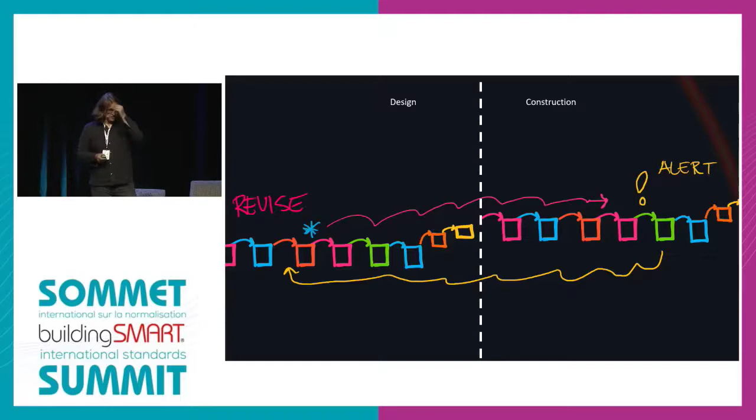If you can't do that manually—because if you imagine how this is done today, very smart and very hard-working people have to trace back through those processes through meeting notes or logs or all these things—if you can't do that, you can't possibly know when to do this. And so the point is that you could make a circular loop within this process between design and construction. But this is just a microcosm, obviously, of the whole industry.

So if we look, where I've started to look at this is a word salad—it's a good term, I do like it. Basically, when I started doing this effort, it just started with this statement: someone wants to change this to that, can we? And this is kind of the question, I think, as you're looking ahead to make a digital twin that can actually react to change, we need to be able to understand how this information comes together.

Some of them are human-driven, some of them code-driven, because at the same time you want to be able to check against code, local requirements, and all these things. And if you think hard about this problem—sorry, I'm going to get myself a drink of water—if you think hard about this problem, this is a very difficult concept to manage today.

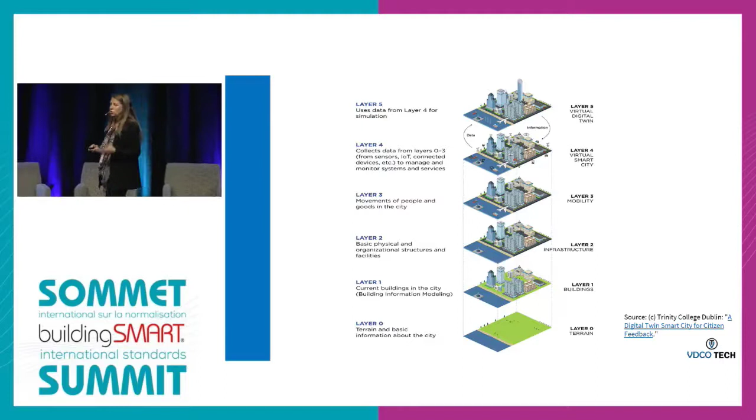That digital twin is where the simulation is happening, so you can come back and inform your citizens: hey, park here, traffic is backed up here. So how you use that and how you simplify it is ultimately how I think you can sell it and procure it. Because there's a lot of planning that needs to take place when we're working in digital twins—the need for it, the use case—but I don't hear people talk much about security of that data, and I think we need to start focusing on that.

BIM execution planning—we all talk about our BIM use cases. I've yet to hear anybody talk about the digital twin use case. So when I start looking at things for my clients—I actually hold the prime contract as a small business under $2 million. I'm the prime contract holder for the BIM VDC on-call consultant that has everything from BIM to GIS to digital twins, down for this county.

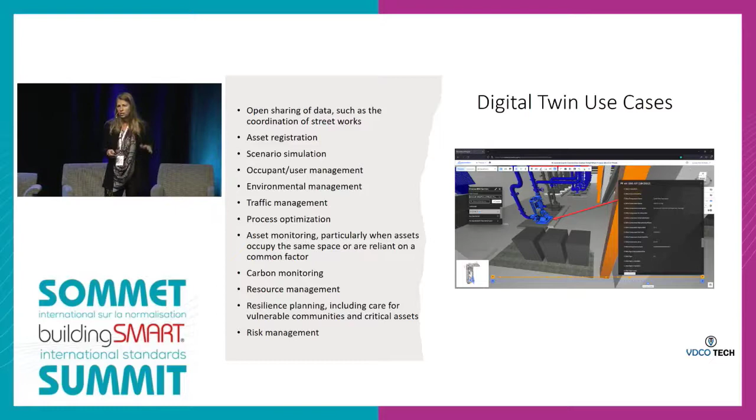And the reason I get chosen is because I say, let's define these uses. Let's look at whether you're going to use it for process optimization. Are you looking at it as part of your asset registry? And ultimately, how we looked at it was for risk management, to help them start down their journey.

And I really don't like to reinvent the wheel. So I am queen of Google, queen of simplification, because I don't understand half the time what all these technology people are telling me. I have to Google what they're looking at—what are these terms, what are these abbreviations. So I look to see what's out there. When I Googled digital twin, did you know there was a digital twin periodic table? Really cool, Google it—you'll find 50 graphs, 50 different things about the digital twin periodic table.

But I found two documents that I think might have value to you. The BSI Flex 260 came out this year—January 24th, 2022. And really it's about organizing, creating, and managing your digital twins as it relates to your assets, your systems, and your processes. It has some good information that I'm going to highlight for you.

But my favorite thing, and why I showcase this, is it actually had a definition, and it's an ISO definition. So I strongly encourage you—if you don't remember anything else about my presentation—please look up the ISO definition for digital twin and use it in your organizations and within your own documentation. It's talking about observable elements that you then tie into a digital representation.

This document goes a little bit farther, and it says how you're looking at the simulation of that asset, whether they be virtual or physical, and how you're tying that into your planning processes, how you're using it for validation, and looking at how we're going back and forth between that observable element and that virtual as part of your digital twins.

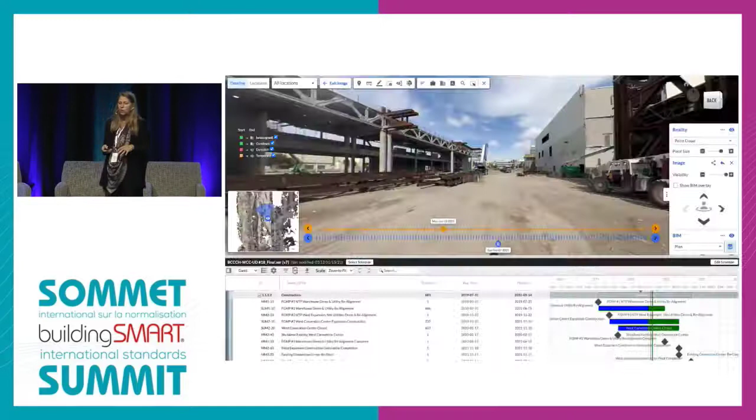We were able to take their photo captures that were already on site. We tied it to the P6 schedule, again, part of my regular service line. What you see in green should be installed at that date and time. What that enabled us to do was to manage project risk. That's the use case. We monitored critical path in a visual way that our clients saw the physical environment and turned it around to say, here's what the virtual environment is, and now here's what it should be.

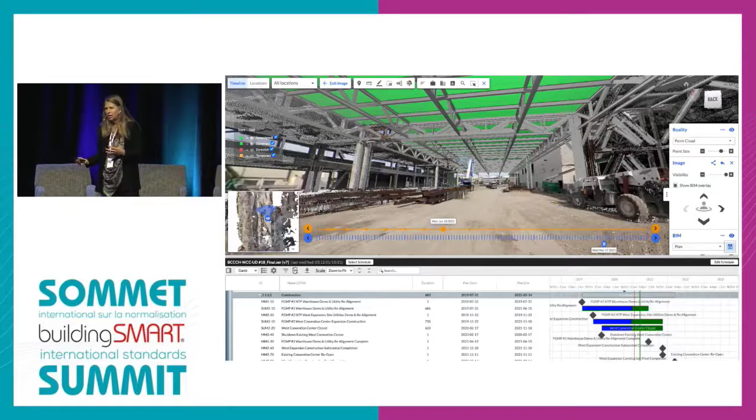Proactive risk assessment, being able to inform that schedule, had immediate value to our client, and it got them excited to talk more about digital twin. If I just would have gone into them and said, here's what I need to implement your digital twin effort, and talked to them about technology without showing them something, they wouldn't have been able to do it. They wouldn't have understood where we were trying to go.

Assets to your digital twin, it's that virtual representation, the real-time data, you're looking at analytics, and it all talks about data interoperability. When you're moving it forward to our clients, the digital deliverability to the asset registry, we look at all the differences, we map their different data sources, we identify pain points. And we say the pain points between these organizations and these systems ultimately can go back to your digital twin, and how we round trip it.

I keep it simple for a reason. The biggest problem I think in our industry that we face today is how we can hire people, and that the people we are hiring have this level of maturity. So we need to educate ourselves continually, but we also need to educate our clients and our workforce, because this is where we're going. The data standards and governance are important. The asset registry and data templates, it all builds upon itself. The digital asset data and onboarding.

How many people have actually been in the field and done in-field data collection? Not a lot. In a room like this, every single one of us should go out there and see, because that's where the process breaks, right there. That's where it costs you a lot of money. So you need to understand how you're getting the data into these systems, where these systems are connected, before you even talk about digital twins.

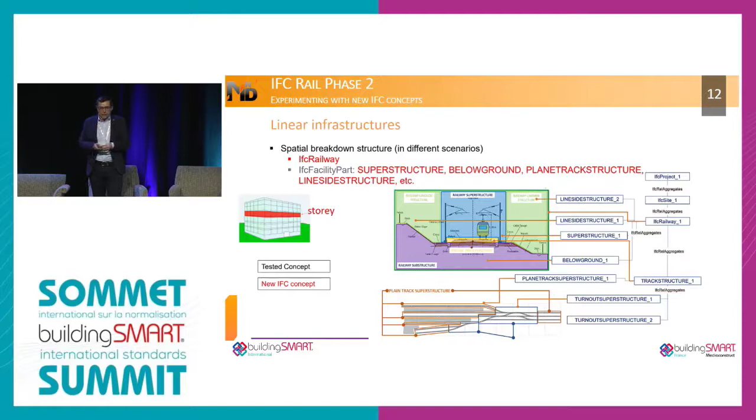The key of this phase was the storylines, in order to validate the project test configurations. The storyline was chosen according to the business cases that were important for the different stakeholders of the project. For example, for MIND and SNCF Réseau, we selected the deployment of the modern signaling system, the ERTMS, the substructure renewal, or the urban railway infrastructure system integration.

I don't have time to describe all of this. Just a few words on the ERTMS, the European Rail Traffic Management System.

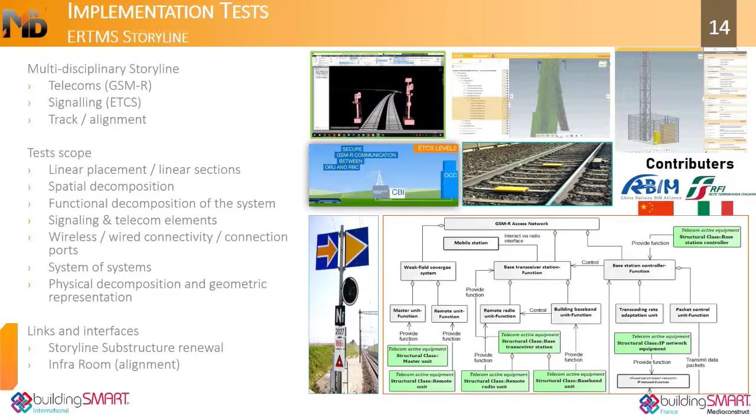It's a multi-domain storyline because it addresses telecom, signaling, and track alignment elements. It's an interoperability system, not only at the European level but also worldwide, which explains the interest of our colleagues from Italy and China. We also addressed the design of a GSM-R, which is the railway telecommunication system, particularly the base stations.

Another example was the urban rail infrastructure system integration storyline, with more than 6 exchange scenarios which cover a multitude of domains like common spatial structure, cabling, and so on.

To finish, the IFC 4.3 Rail Phase 2 success probably comes from the work of multiple groups, railway stakeholders, and software editors who contributed directly to the implementation tests. The most important fact is these actors have strong conviction about openBIM.

It's the case of SNCF Réseau, my company. For us, openBIM is a core value already implemented in our strategy. We are really convinced of the importance of openBIM: first, interoperability; secondly, the openBIM solution ensures independence from software editors, as we can use multiple data sources and open objects.

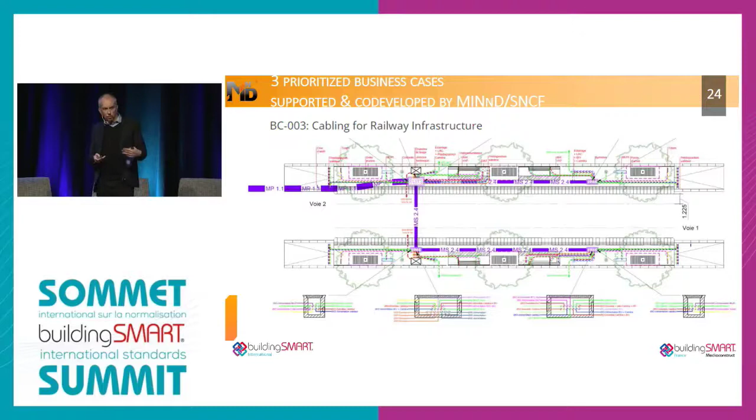The first is about model federation. The second is about stationing along an alignment, which is very specific to infrastructure and has to be implemented regarding the best practices of the business. The third is about cabling for railway infrastructure, but it is also a common business case that is very valuable regarding how to describe networks in a territory.

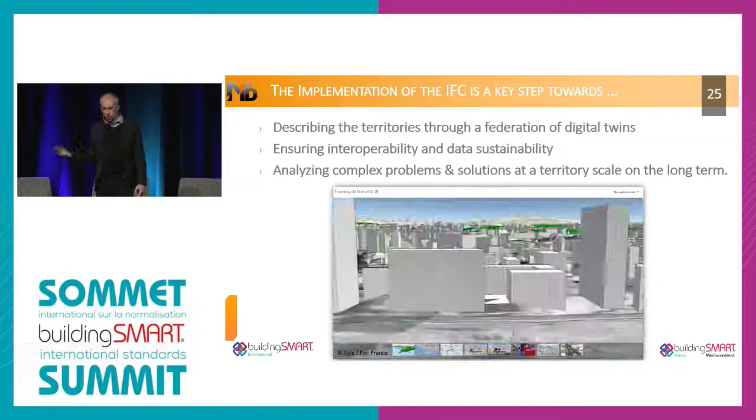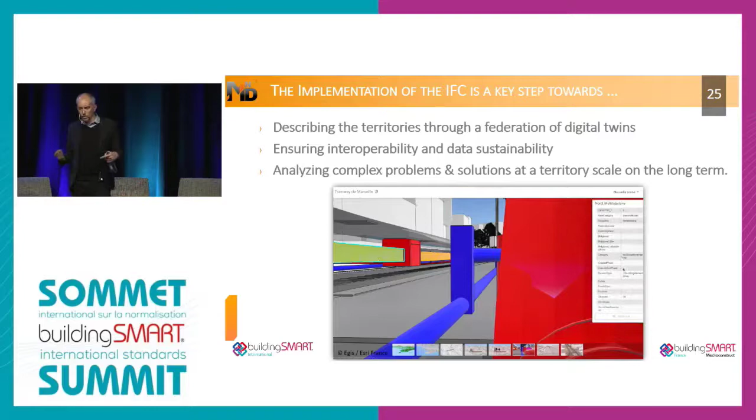So to finish with, we think, as French stakeholders, that the implementation of the IFC is a key step towards describing the territories through a federation of digital twins, ensuring interoperability and data sustainability, and analyzing complex problems and solutions at a territory scale on the long term. Thank you very much for your attention.

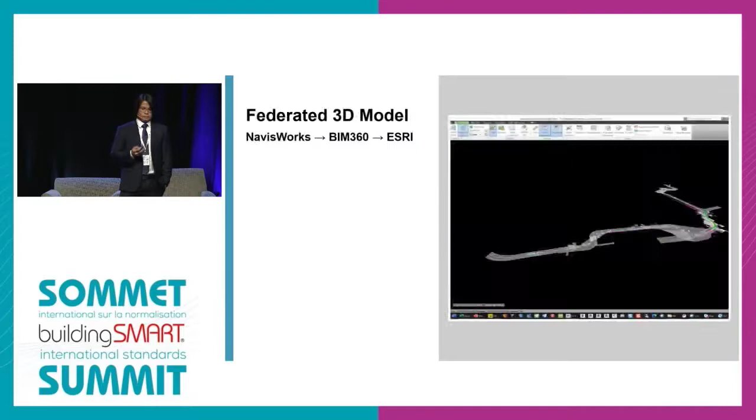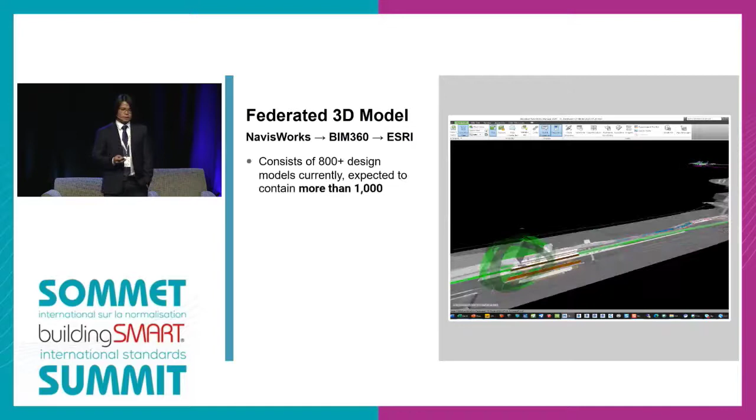So lastly, here's a snapshot of our federated 3D model, which we created using Navisworks. In this example here, we have around 800 plus design models, which is a combination of our vertical design and our horizontal design.

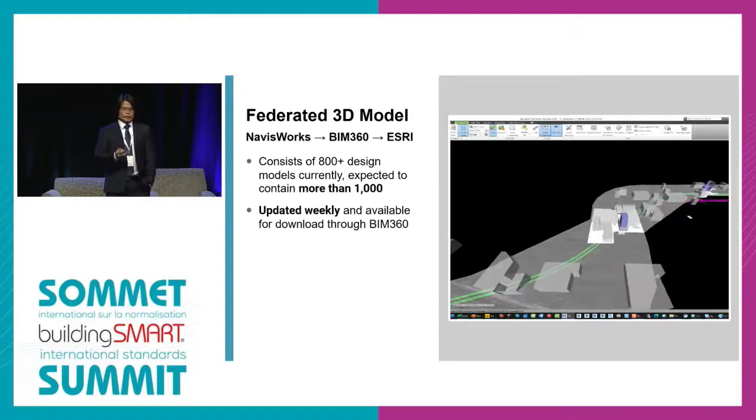What we do is we have this weekly update into BIM 360 dedicated folders, and we put this together so then the project team can access it. Again, these are source models that we use for plan production, but then we export them to Navisworks file versions for our federated 3D model.

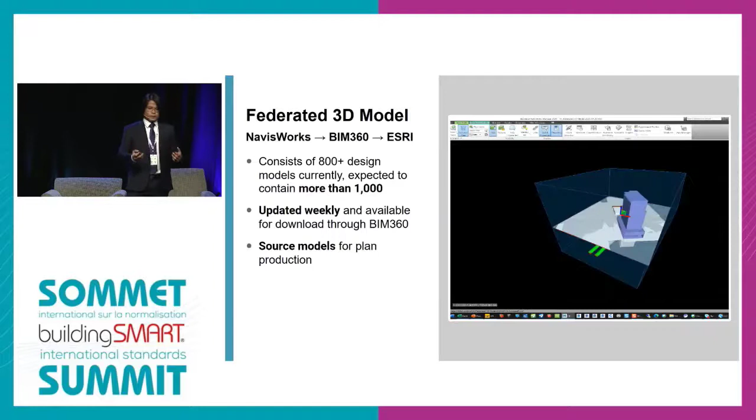Now, lastly, these models are used for clash detection and 4D phasing in conjunction with reality mesh and LiDAR project data. And Cameron will talk about that later on, so I'll pass it back to you. Cameron? Great, thank you, Ken.

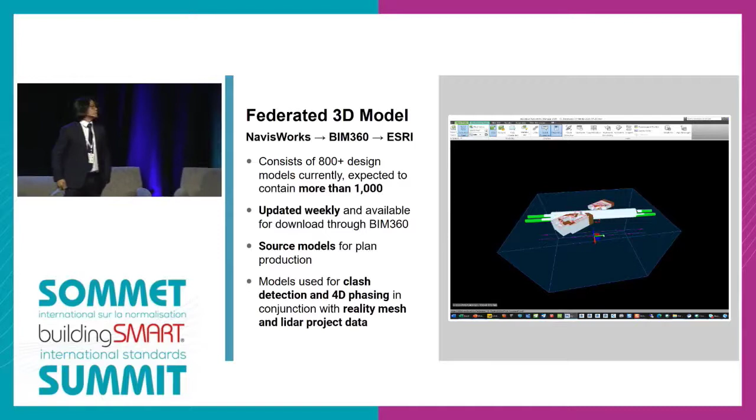Yep. So a lot of common themes here today. Different information and different platforms, and how does it get utilized, and how does it get consumed, and how does it get organized, right?

And the whole point of why we really wanted to walk through the digital delivery workflows and how we manage that information is because I think it's really important, and what we've learned, is structuring the data that you have at the beginning, setting up those protocols early, listening to what the client's needs are and the end states, and then defining how you're going to get there.

So that's great. We've got all of this data. We've got 10 terabytes of point cloud information, 1,000 models. But as Cindy was talking about earlier, how do you distill this down from a client's perspective to what that means, and what they can do with it?

Generally, with the clients, with the executive teams, with the stakeholders, you're not going to set them up with a $12,000 BIM computer and have them look at this information. They need an easy, accessible, intuitive way to access this information. So from the beginning, we talked about this idea of our Ontario Line GIS Hub, and this is a tool to reflect progress through a single source of truth.

I like to refer to it as a window into everything that we're doing from the technical side. It's not a replication, it's a window to see through into information.

We defined that need at the beginning for a comprehensive ArcGIS Hub solution that would allow us to reflect our up-to-date design intent to a much wider audience. We've got well over 1,000 individuals using this tool. We needed the ability to share single source of truth information across multiple different stakeholders, companies, time zones, countries, offices.

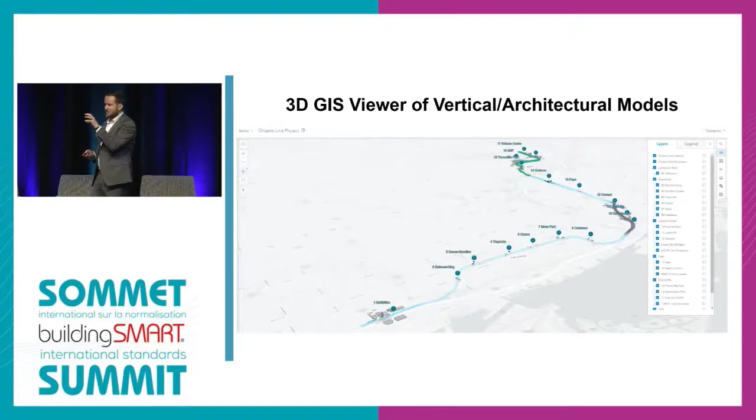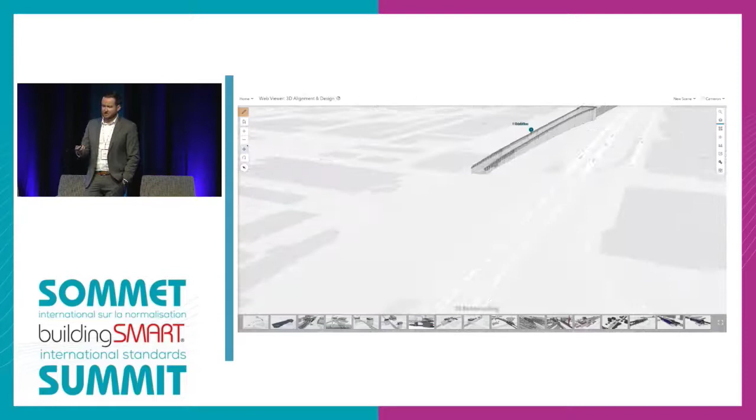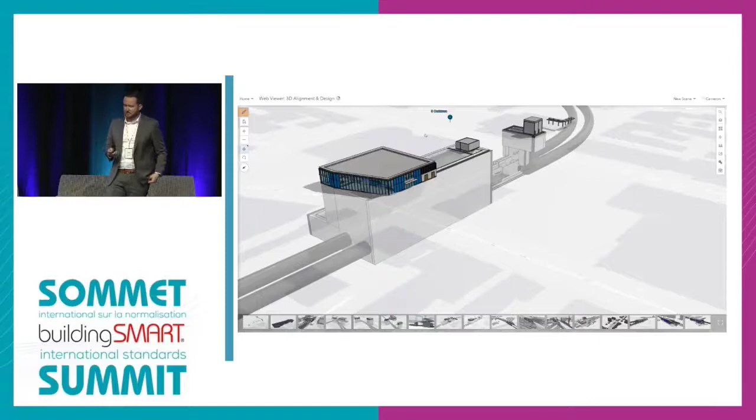So we started with all of that information, and the first step was taking those models that Ken talked about, over 800 models, and making those accessible and putting those geospatially in context. That started our path of connecting our BIM 360 models into the Esri 3D scene environment, with a dynamic automated connection so the same information informing our design is auto-populated and made available through the Esri web environment.

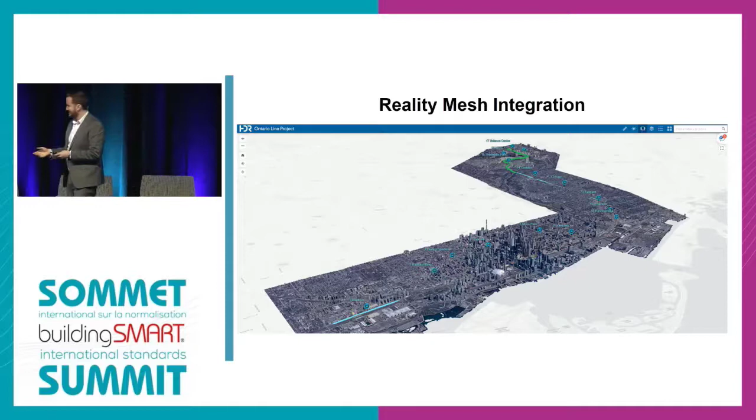We then took it a step further and said, what about our reality mesh data set? For those unfamiliar, a reality mesh is a photorealistic survey grade mesh that can give you various levels of accuracy. We partnered with a vendor called Nearmap, an on-demand reality mesh provider, that provides data roughly 11 inches horizontal, 16 inches vertical accurate. Reality meshes can be created up to centimeter accuracy as well.

This is a 20 square kilometer mesh of our project footprint that we're able to bring into this dynamic GIS viewer. It's not just GIS this mesh is helpful for—we can also integrate various forms of this mesh, whether 3MX, OBJ, FBX, or even point cloud information, into design applications like Civil 3D, Revit, and InfraWorks. This becomes key to how we can better contextualize and understand the built world we need to integrate into. That was our next step, integrating this into the GIS Hub.

This is a very large file, traditionally very hard for people to use, consume, and access. No longer is that the case—it's through nothing more than a web viewer now. So this is a core component of what we ultimately see being part of our digital twin solution.

As Cindy was talking about, I think she referred to them as layers of the digital twin—there's maturity levels of digital twin, different ways of saying what that data is and how you progress. This is a core component of that very first layer.

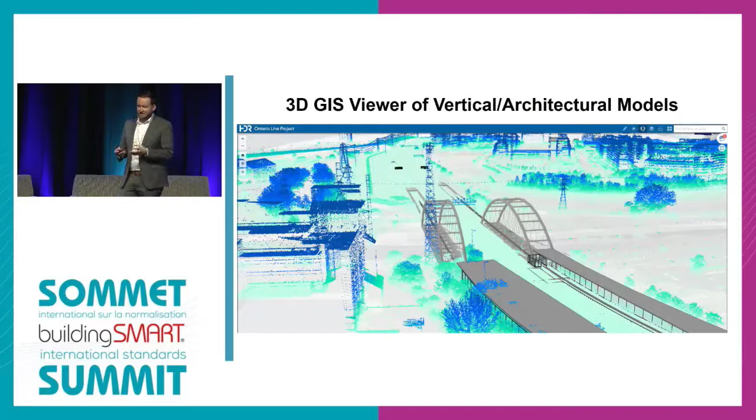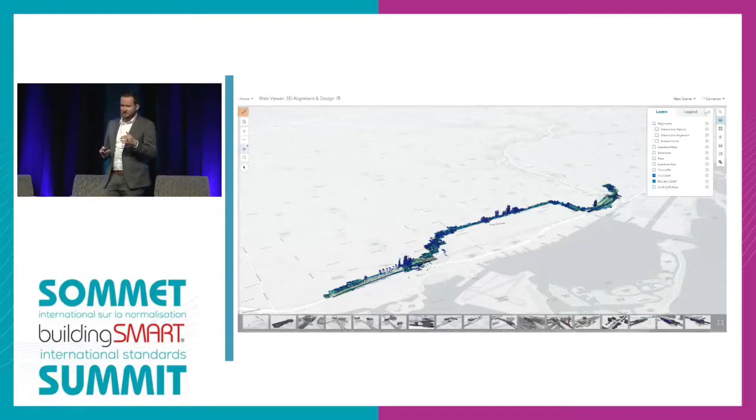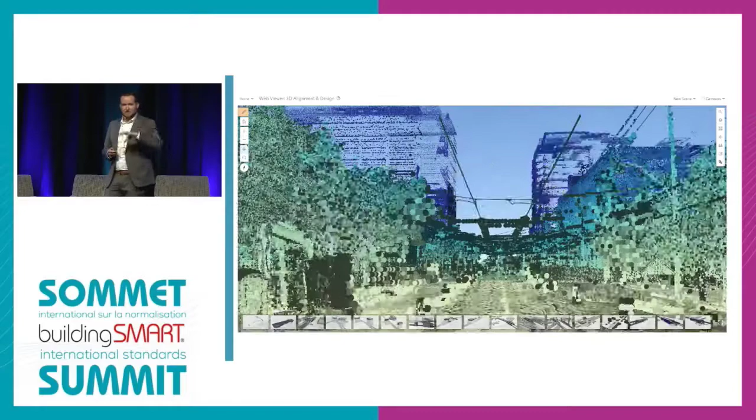We then looked at how do we take it a step further. We have over 10 terabytes of point cloud information, whether aerial, terrestrial, or mobile LiDAR, and there's not a person at our company who can process, manage, and run all of that LiDAR on a single desktop application. So we brought this into the same tool, and now we're able to take all those 10 terabytes of point cloud information and distribute that to thousands of individuals—more informed information in more people's hands to make better decisions.

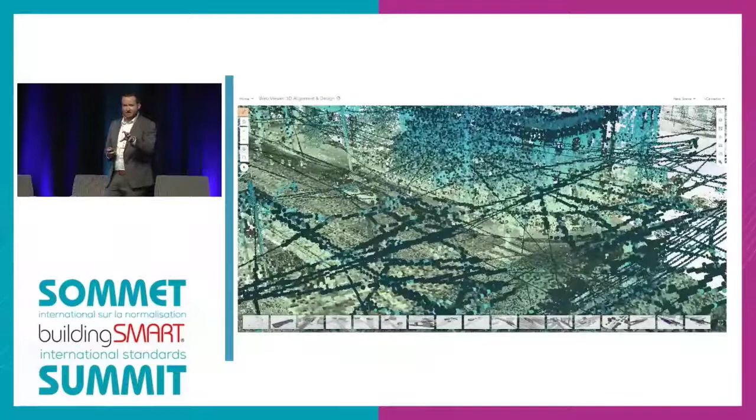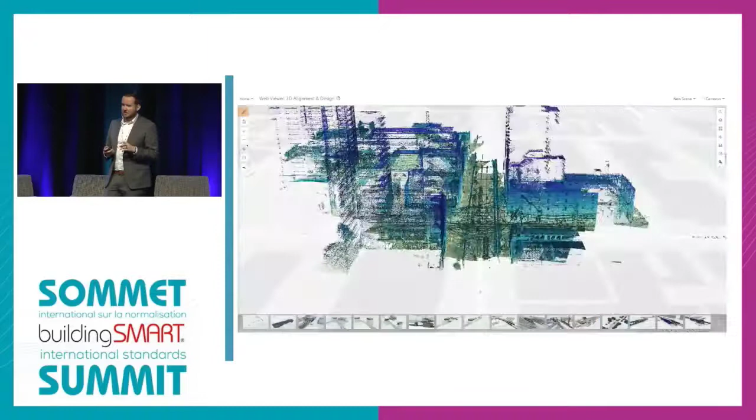Being able to look and contextualize, in this case up to centimeter accurate reality capture data, along with our proposed models, really helps our team understand and have conversations around a 3D environment rather than always trying to do it in a 2D environment.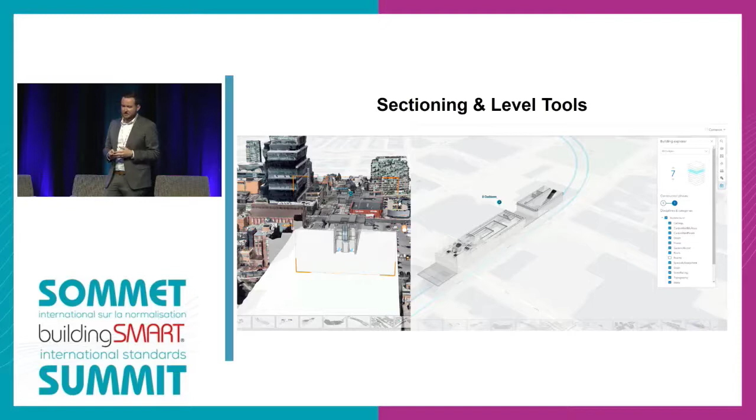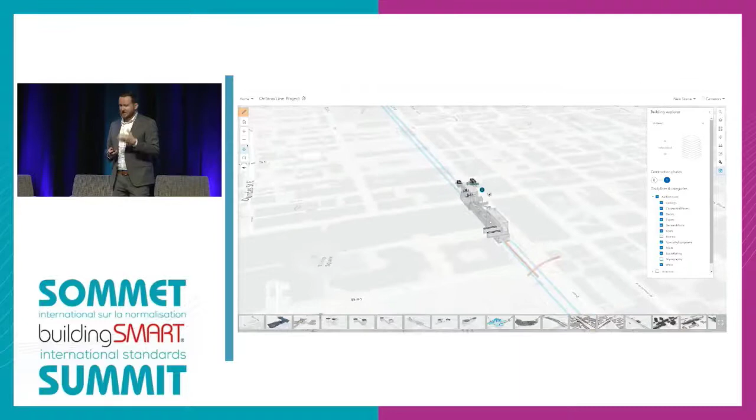And then lastly, one of the other tools within our 3D GIS hub are sectioning and leveling tools. Because this information is dynamically populated from BIM 360, it's not just the model that's populated, it's also the information within that model. So we can use Building Explorer to look at the different levels of the model, the different construction phases within the model, and various attributes, turning those on and off. We're putting these tools in the user's hands, not having to do this for our client or our teams from the digital delivery perspective.

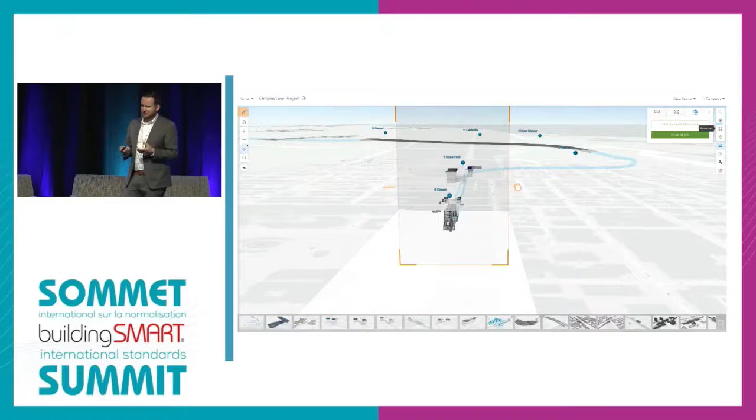This is an intuitive, easy tool that our teams are able to use. There are different ways to slice and dice the models, and various different content as well, as you can see here. Easy, accessible tools let the user place those section cuts to slice it in whatever way they want. The unique thing is whatever information is turned on, whether that's GIS information, BIM models, reality mesh, or point cloud - when you set up those section slices, it's all dynamic. It looks at all of that information for you, putting the power in the user's hands.

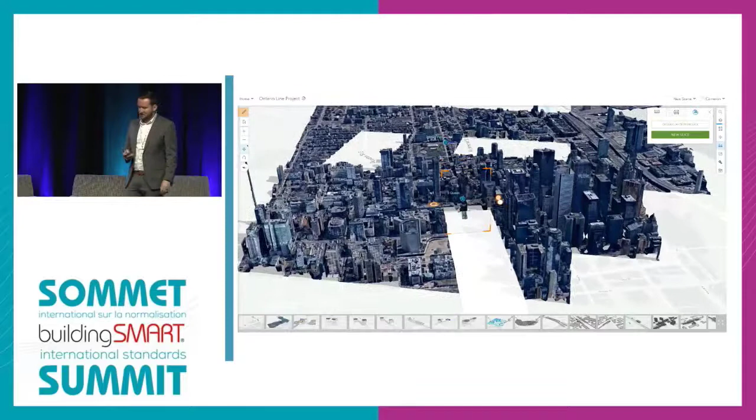So that whole workflow is very much BIM to GIS, and I think that's what gets a lot of attention and focus right now in our industry. But one small use case of the other way around, GIS to BIM, I think is just as interesting. When we talk about open data and interoperability, that's a two-way thing, not just one-way.

This is a quick example of where we were able to take city geodatabase information of existing utility information and automatically populate from that GIS data source directly into Civil 3D pipe networks. We took information like utility type, diameter, material, and automatically populated that within Civil 3D at assumed depths based off of utility types.

Is that an as-built of existing utilities? No, absolutely not. But what it does let us do is start ahead - we're not starting with 2D individual line strings that have to be individually modeled. We're using the intelligence we already have from the GIS database and starting from there, bringing it into the BIM environment. Then when we go out and pothole and trench these utilities, we're just updating the information from that 3D SUE Level D model into something more accurate. I think we're going to see more and more of this interoperability, not only going from BIM to GIS, but GIS back to BIM.

When we look at the 3D integrations and this cross-platform collaboration, to summarize, these models are pushed dynamically from our BIM 360 design environment to the ArcGIS hub. The automation of those steps through the BIM 360 cloud connector was a game changer for us - we weren't able to do that from day one.

There's been new tools and developments, and timely data is trusted data. If you don't have accurate information in there, you run into issues very quickly, as we all know. So it provides this design detail and updates our stakeholders via nothing more than the web browser, through the native file reading of multiple different file types - you're getting more and more into these open data standards.

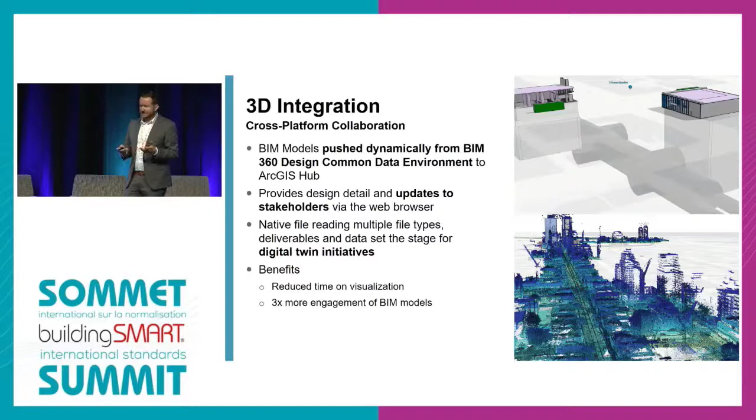I really think this is starting to set the stage for various different digital twin initiatives. The immediate benefits we're seeing today with this tool are really based around an extremely reduced time spent on visualization. We're seeing, from what we can track from our usage, over 3 times more engagement and involvement in our BIM models. And at the end of the day, what we all want - improved communication and better coordination between our project teams.

Lastly, looking more towards the future and what's next, we're currently piloting GeoBIM, which is the next evolution of the Esri solution that has further integration with the BIM 360 platform. It's a single application for 2D and 3D content that can be managed all through one very intuitive hub.

What's interesting and unique about it is we are now able to leverage BIM 360 model viewing capabilities, which are much more detailed and have much more information within them, in split screen. So you've got GIS on one side, BIM 360 right on the other, all in one intuitive user interface - a nice little feature.

And then we've also got issue management integration. With a single source of truth, the issues live on BIM 360, but those can be populated from BIM 360 or from GIS, opening up the ways in which people can flag these issues, communicate these issues, and ultimately report on those issues.

So with that, thank you for giving us the time, and I guess we'll go into the questions here if we've got some time.